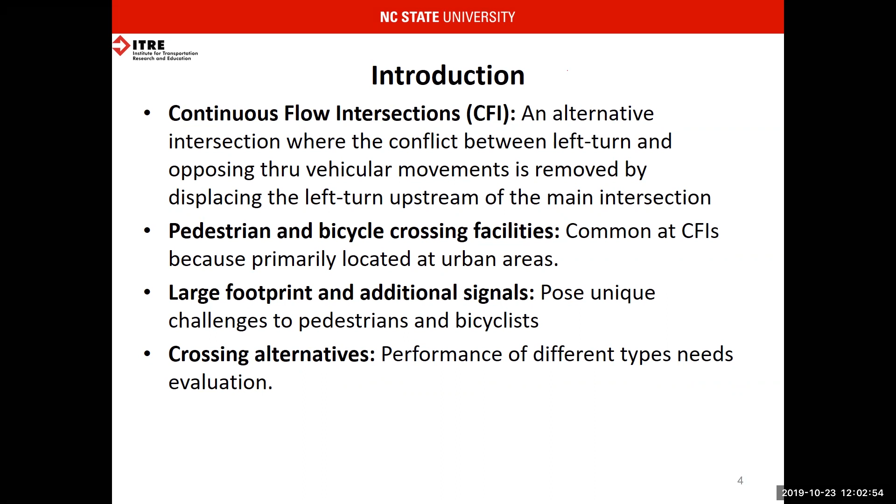Pedestrian and bicycle crossing facilities are common at CFIs because they're in urban areas, but they can be complex, and that's one of the reasons we did this work. CFIs, from a geometry standpoint, have quite a large footprint with additional signals compared to a standard intersection, but usually have a smaller footprint compared to the grade separated option, which would basically be the next option if you move from a standard signal and don't choose some type of alternative.

Let's talk a little about the reason CFIs are typically the vehicle of choice, and about the operation. The key motivation for the CFI is that it's cheaper than grade separation. Instead of spending $2 to 4, 5, even $6 million plus on a grade separation, acquiring right of way, and moving lots of utilities, this option can give a lot of benefit over a fairly long period of time. So it's considered often, and it's typically all about improving vehicular mobility, especially between the heavy through and left conflicts.

If you look at the big picture here on the bottom left, the whole idea is to separate conflicts. Using the west to south movement as an example, a left turn heading westbound conflicts with the eastbound through at a standard intersection, but we can remove that conflict by putting an intersection just upstream on the east side and adding another signal. If we do this at multiple approaches with multiple signals, we move those conflicts around to gain efficiencies so they no longer conflict. Now the lefts can go with the concurrent through movement without a conflict, and we gain lots of efficiencies from that.

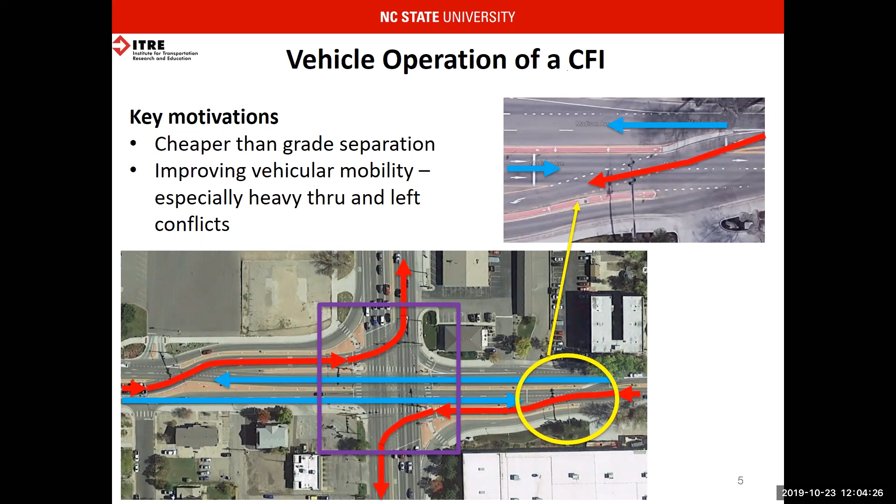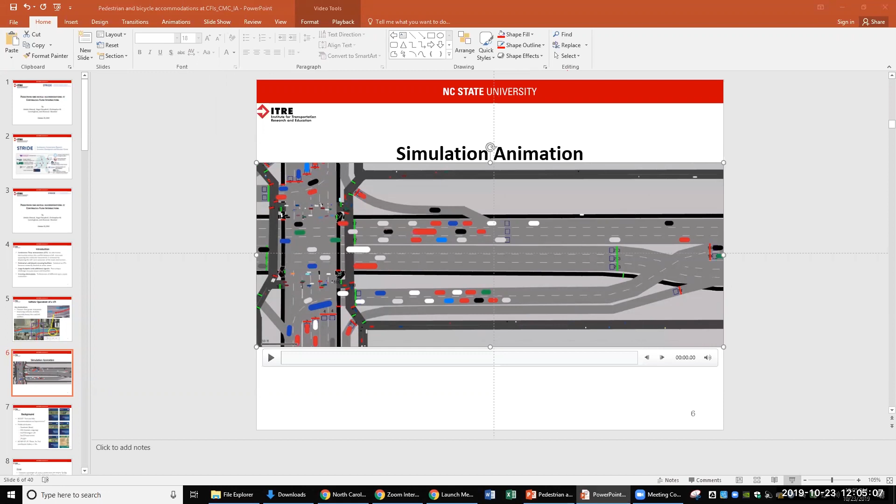Just to make sure everybody's with us here, I think most people probably know the CFI. I don't know if I'm going to get this to work. Let me try it this way. Why doesn't this work? It's okay, we'll move on, I think we've done enough explanation. One second, it's over here, that's the problem. All right, sorry about that.

A little bit of background: around 2010, the North Carolina Department of Transportation, which implements a lot of superstreets, sometimes called restricted crossing U-turns, got a lot of pushback on two main things. One being business owners in the area don't like being redirected and not having direct lefts, but also there are a lot of advocates for pedestrians and bicycles who push against the implementation of a superstreet.

So a project was done, two projects actually, one on the pedestrian side and one on the bike side, to look at the accommodations on super street and look at options for accommodating those users.

Around 2014, several alternative intersection and interchange guides, that's what AI stands for, were put out by Federal Highway Administration. The newest one was in 2019 on the quadrant intersection, so if it's not already out, you should see that soon. And then the diverging diamond interchange, which has ongoing updates to the geometrics, safety, and signals pieces of those guides, was published in 2014.

And then the median U-turn, that's the federal highway name. The common name leading up to that was the Michigan left, was put in place also. The restricted crossing U-turn, which we call the super street here in North Carolina, has even gotten a new name in North Carolina. And then what we're looking at today, the CFI, or the divergent left turn, is what Federal Highway calls it.

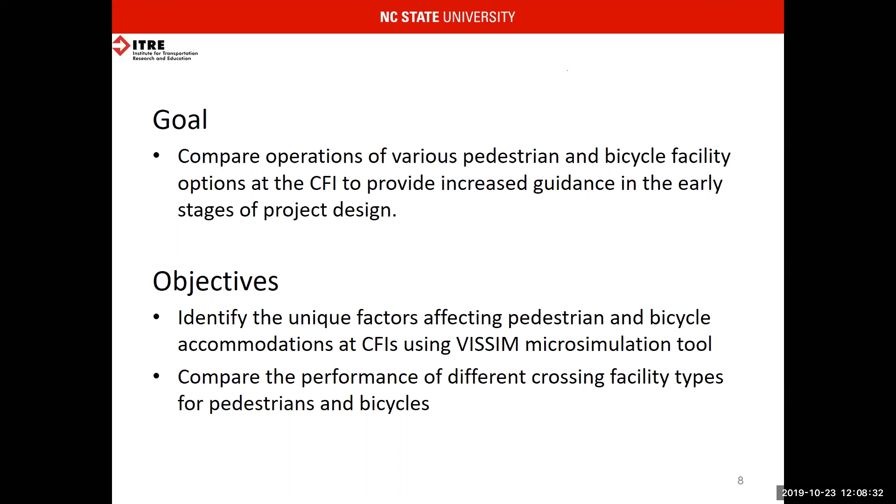So from NCHRP 07-25, there are a few options that several practitioners have recommended over the last decade or so for CFIs. The three that really rose to the top in several of those focus groups were what we call the traditional crossing, the mid-block crossing, and the offset crossing. So the focus of today will be operations at those three facilities.

So a little explanation: the traditional crossing, this is the one—if you go to Utah, you can see some of the earlier designs here. The traditional crossing has each of the pedestrian and bicycle facilities single staged. One thing you should focus on here is that when we're talking today about the divergent left turn of the CFI movement, we're just going to look at this southeast quadrant. So we're going to talk about this offset left here, this left-over for the CFI, and how it conflicts with the west-to-east or east-to-west pedestrian or bicycle movement here.

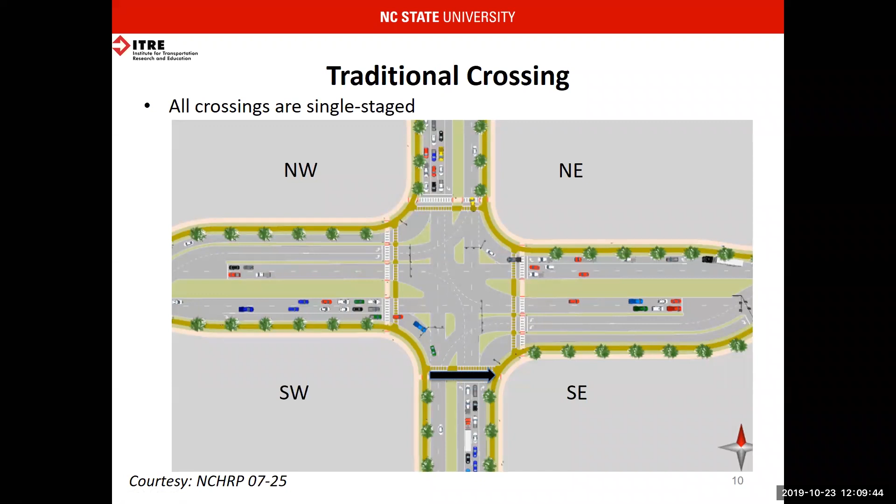So here we have single stage crossings on all approaches. It's not an efficient design, but the problem here is that the left turn conflicts with the side street crossing here on the south side. So the left turn movement entering has a conflict. And because this problem exists, if there's significant pedestrian demand here, then we get a lot of inefficiency in the CFI that we thought we were going to gain with the vehicular movements, because now we have to serve four possible phases.

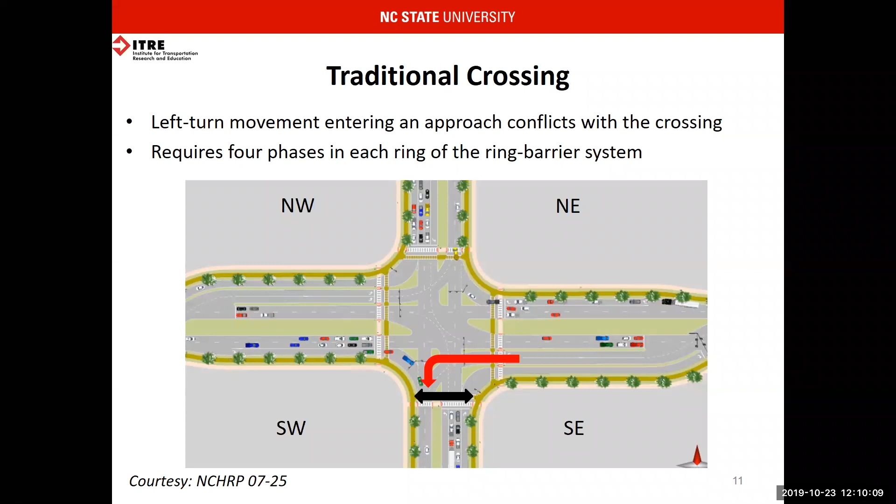So just real quickly, I could show this in a lot of different variations. So this is the simplest version.

Let's talk about the mainline movements. If we have throughs going, then the concurrent peds can go in parallel. But then the throughs can still go with the left turns now because they no longer conflict, but now the peds can't go. So we have to run the peds separately first if the ped push button is pushed.

And then we cross the barrier and go to the side street movements. And now the concurrent peds going north and south can go with the north and south through movements while the leftovers go. And then we have to turn the peds off.

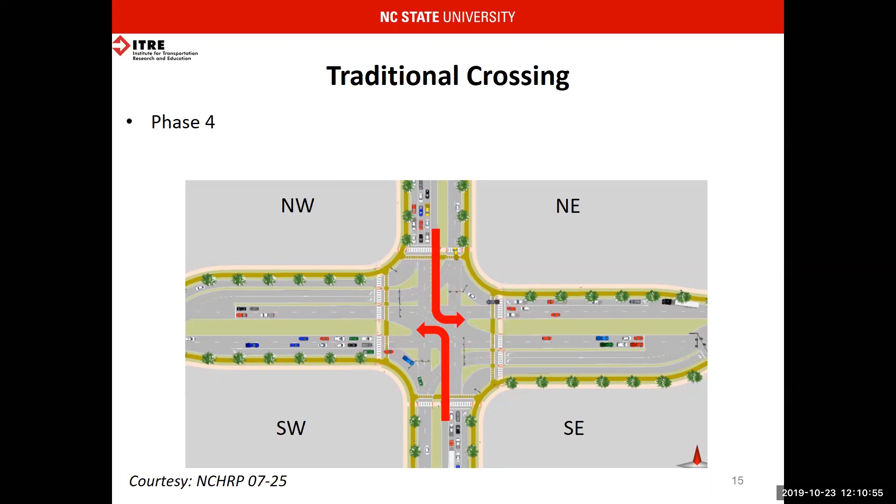And I think I have that wrong. Yeah, the left turns will lead into the through. So that would be 4 possible phases.

And so it's not super efficient if you have any significant pedestrian volume at all, regardless of how well the design works, walking through it as a pedestrian or a bicyclist.

The second option is a mid-block crossing. It's similar to the traditional crossing. The only thing we do is we take the north-south pedestrian movements and we shift them down to where the leftovers are, up and downstream.

Now, this is primarily done for safety. So if you imagine in the traditional crossing with the pedestrian crossing movement moved up close to the main intersection, we have lots of different movements to cross. It's confusing. It's a longer span of lanes to cross.

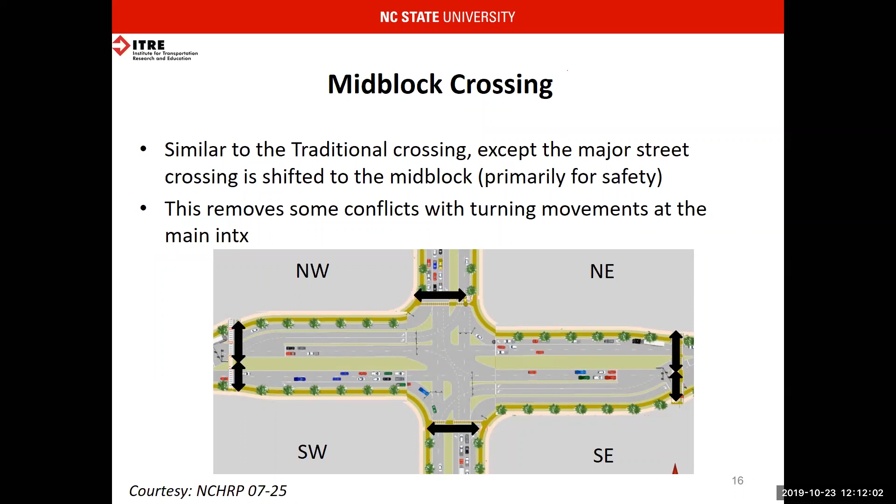And so this would really be more for a safety treatment. And so if you know you've got a heavy origin destination from one quadrant to the other or vice versa, then you can set these up with mid blocks to help facilitate the movements and get them away from the main intersection. And it does remove a little bit of the conflicts also.

So the mid block signals are placed at the existing displaced left turn as I described. And then signal timing of the mid block does not incur additional delay to the through vehicular movements. You'll see this, I think right as I get towards the end of my portion of the presentation, when we calculate the cycle lengths literally are the exact same for the traditional and for the mid block. And so from an operations standpoint, from a timing standpoint, they're basically the same.

It's really just a safety treatment. But we'll see what happens when we look at the times, or the stop delay and such, the different performance metrics in a second.

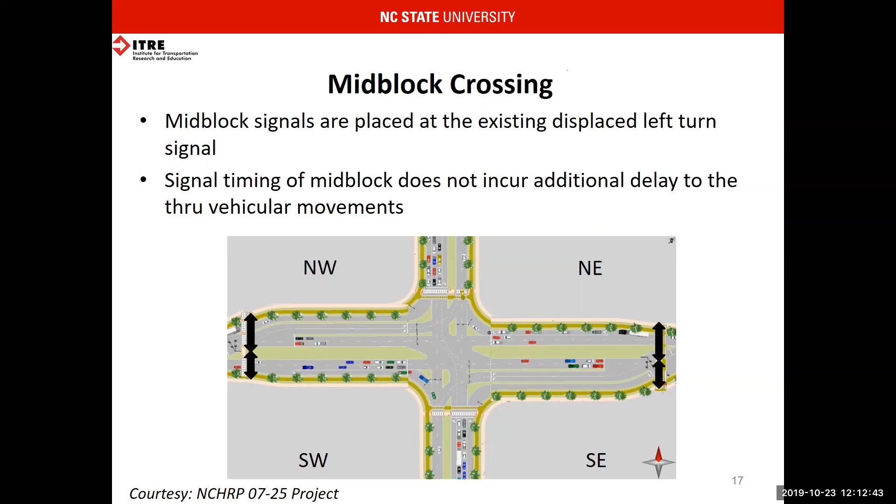And then the third one is an offset crossing. So basically, the left turn conflicts, if you look here in red, that existed where the crossing used to be, we now offset that ped crossing on the other side of the left turn. So now that conflict no longer exists.

And so we remove this conflict. Now we don't have to hold that left while the peds cross. It can actually cross between the through and the left turn movement, and we get rid of those two exclusive, or those two ped phases that had to be called separately earlier.

And so the rings accommodating pedestrian bicycles are now only 2 phases. So we get our efficiency back. We tighten up the intersection a little bit for the peds and bikes.

Okay, and then all crossings are multi-stage. So if we see here, we cross in one stage going from west to east or east to west, depending on where you are in the crossing. So let's just assume we're coming from the southwest quadrant.

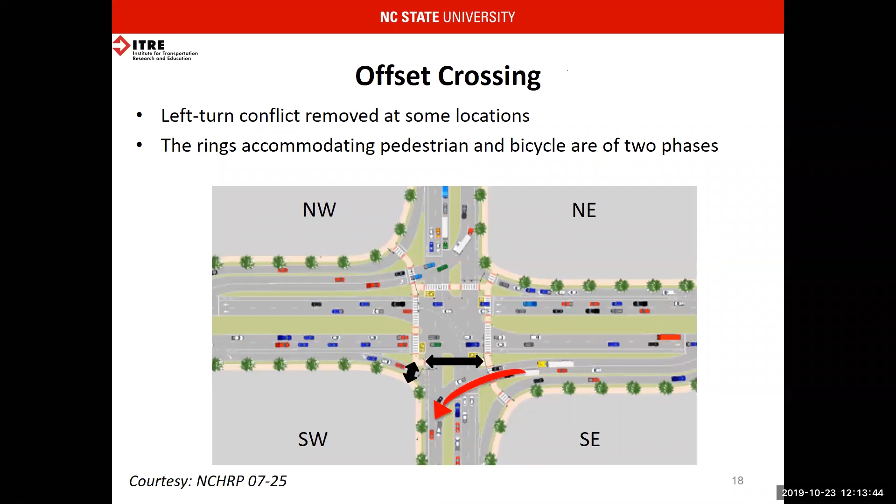We would cross southwest with the left turns crossing. The left turn would end. And then now this movement can go with the through. And so it happens nice and clean.

Now, one of the things that we're looking at, we're going to compare these 3 different CFI designs, but we're also going to compare them to a standard intersection.

So this looks a little messy here, but basically what we have here is a standard 4-leg intersection. It's a 6-lane facility in both directions with dual left turn lanes on all approaches. And so if you can just imagine that each of those CFI options, we're gonna show at the end here how that compares to the standard intersection also. So just keep that in mind.

Now the geometry, that's not always a 6-lane with a dual left turn lane. The geometry is selected by looking at the V over C for the different volume combinations that we have for the CFIs. And so we'll talk a little bit about how we did that in a second.

The alternative scenarios we generated in our simulation models for the bicycle had 2 different options: walking with the pedestrian on a shared lane facility, using the sidewalk configuration like a shared use path, or having an exclusive lane on the road. So it's one or the other as the option for bicyclists, while pedestrians will always walk on the sidewalk.

We also compared 2 different divergent left turns, or CFIs. We had a partial CFI, where only the DLT legs are on the major street, and a full CFI, where the DLT legs are on all approaches. For the right turn control type, we had signalized movements, and vehicles always yield to the pedestrian or the bicycle.

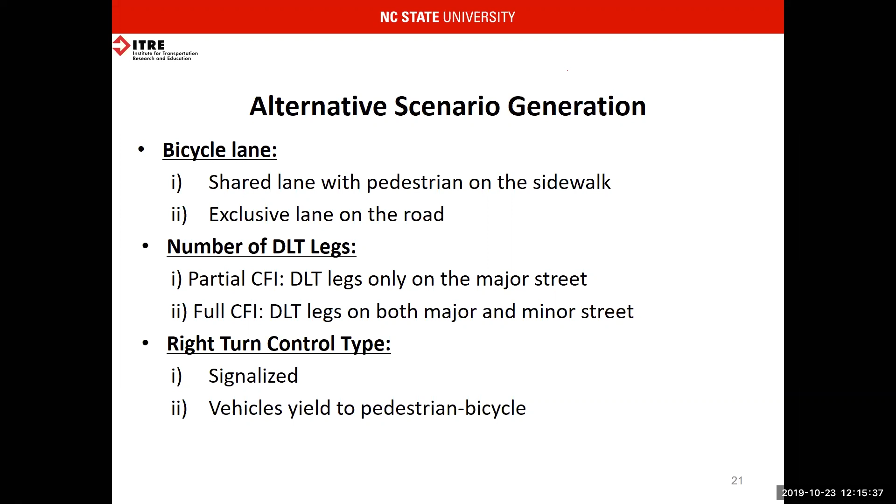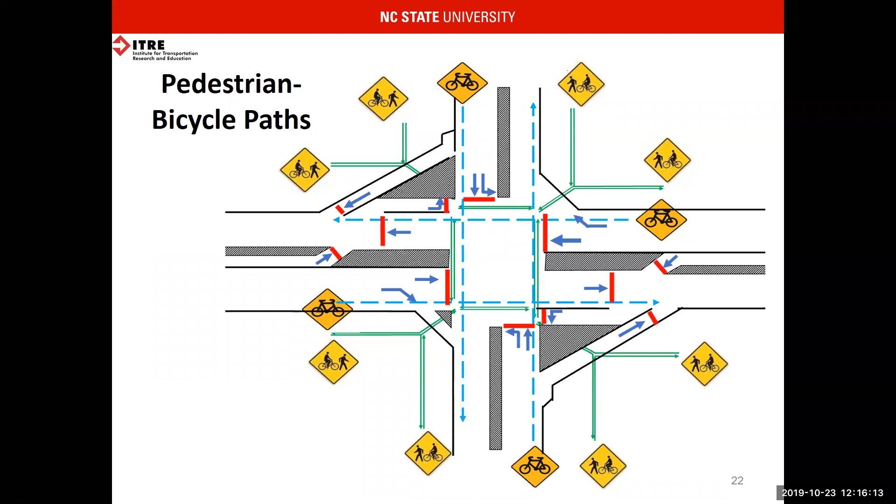Building a little bit here, vehicle movements are shown on each approach with the stop bars, and I'll animate to show exactly what we meant on that last slide. Shown in blue are exclusive bicycle facilities that we included, going with the vehicular traffic in the through lanes. In green, where the pedestrian facilities are from each quadrant, we have shared facilities for bicycles and pedestrians combined, just to make sure everybody understands.

A few parameters in simulation you should be aware of: the volumes were created using a tool called Cap-X, which stands for Capacity Analysis for Planning Junctions. This was created by Federal Highway Administration a long time ago, but it's had several recent updates in the last 6 to 8 years, and more recently with some ICE tools to include various facilities. We created our vehicle volumes based on a V over C of 0.7 for the facility.

The speed distributions were important for pedestrians and bikes. If we're going to look at things like travel time, we needed the speed distribution for pedestrians and bicycles, so we collected field data on 6 North Carolina intersections where these types of designs were in play. For simulation, we ran each simulation for 1 hour and replicated that 25 times.

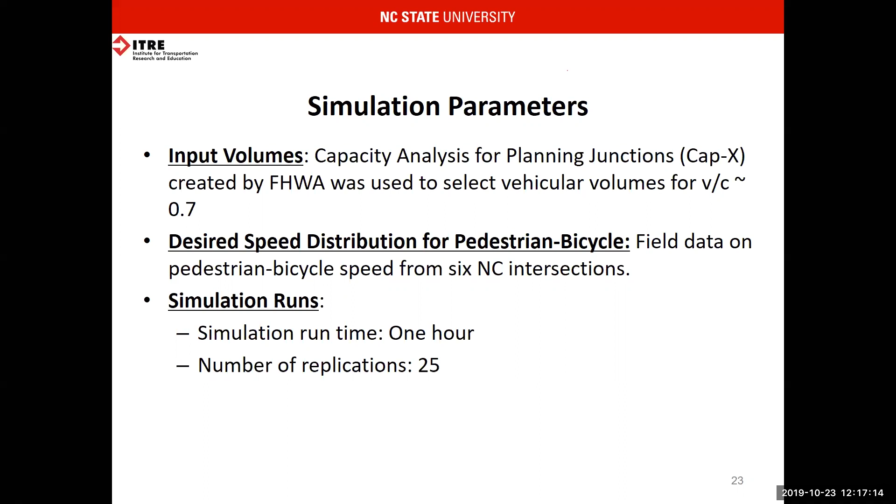From the signal timing standpoint, a semi-actuated signal system was assumed with standard detectors for each model. The cycle length was minimized using linear programming, and the V over C for each vehicular movement had to be less than 0.85 - this was one of the constraints we put on it.

For the partial CFI, which is the leftmost portion of the graph, the cycle lengths were the same as the traditional mid-block because we're just moving the pedestrian down to the mid-block, but it functions very similar to a traditional intersection from a signal timing standpoint. For the offset, because we shrunk the crossing distance on each approach by moving the crossing point past the left turn, the cycle length was a little smaller in those cases for the full and partial CFI.

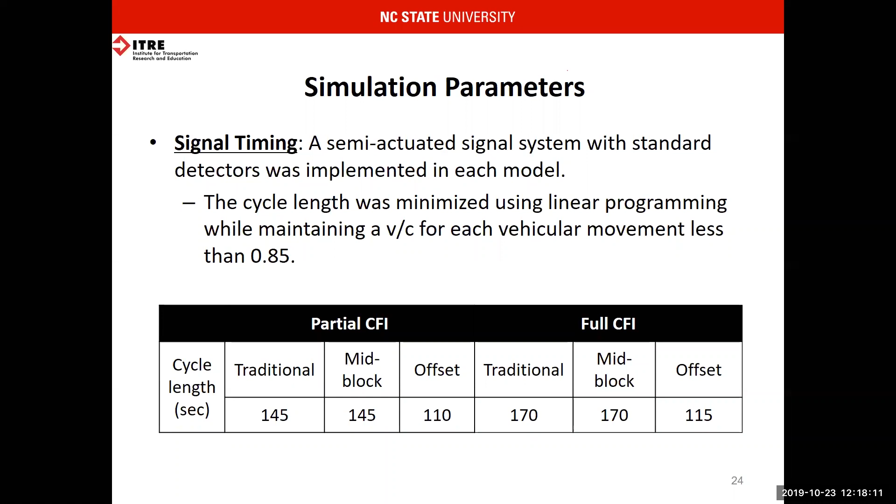And Ishtiak now will talk a little bit about the performance metrics and analysis. Thank you very much, Chris. The remaining part of the presentation that I'll be presenting is about the simulation results. Thanks, Chris, for giving such a nice introduction on the CFI.

Before I start with the performance measures, let me go back a few slides - for example, here where we have the quadrants. The performance measure results are divided into 2 parts: one is the route level performances, aggregated for each of the crossing alternatives that we have from the 3 crossing types and other variations.

As you can see, there are 4 quadrants here, and we can divide all the routes into 4 categories. One is crossing the minor street, as in this figure, either between the southwest and southeast or the northwest and northeast quadrants. The other is crossing the major street, which requires crossing a lot of lanes for pedestrians and bicycles because of the displaced left turn - the footprint of the intersection is larger than a standard intersection. That route category is like the southwest and northwest between these 2 quadrants, or the northeast and southeast quadrants.

The remaining 2 category types are the 2 types of diagonals that we have. Usually we have 1 type of diagonal, going either between northwest and southeast or between southwest and northeast. But in a CFI, like a partial CFI, these 2 types of diagonals have 2 different configurations - the ones facing the displaced left turn intersections, for example at the corner of the northwest. Let me use a marker here.

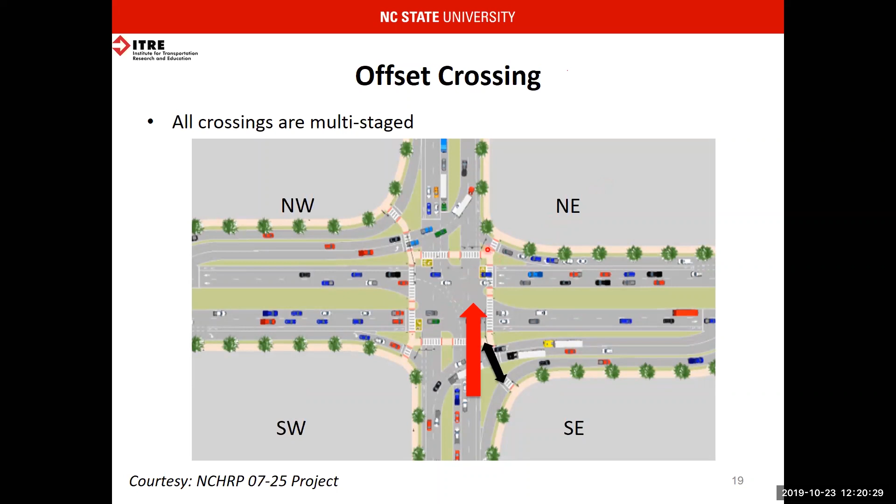So here is the diagonal that faces the displaced left turn intersection, and this one also here, and this one. So I'm terming that as a diagonal with DLT, or the displaced left turns. And the other ones are the southwest and northeast diagonals, which don't face the displaced left turn intersections.

About travel time and stop delay, if we compare different routes or different alternative scenarios, in many cases travel time and stop delay give similar trends across different routes. If those routes, like the lengths and configurations, are very similar, stop delay becomes a function of travel time. However, in some cases, for example the midblock crossing, some travel times for some routes will be much shorter than other routes. That's why we keep travel time as separate.

But in this presentation, overall on an aggregated level, we found that these two trends give similar trends across different alternatives, not values, but trends. So in this presentation, I'm just including the stop delay and the number of stops, which is very important for pedestrians and bicycles.

So let me start with the route level analysis. This is for partial CFI, and in these 2 bar charts I'm showing the most common trend of stop delay. If you look at the left-hand and right-hand side figures in this slide, they have the same trend in terms of the traditional at the left-hand sidebar, midblock in the middle, and the offset at the right-hand side.

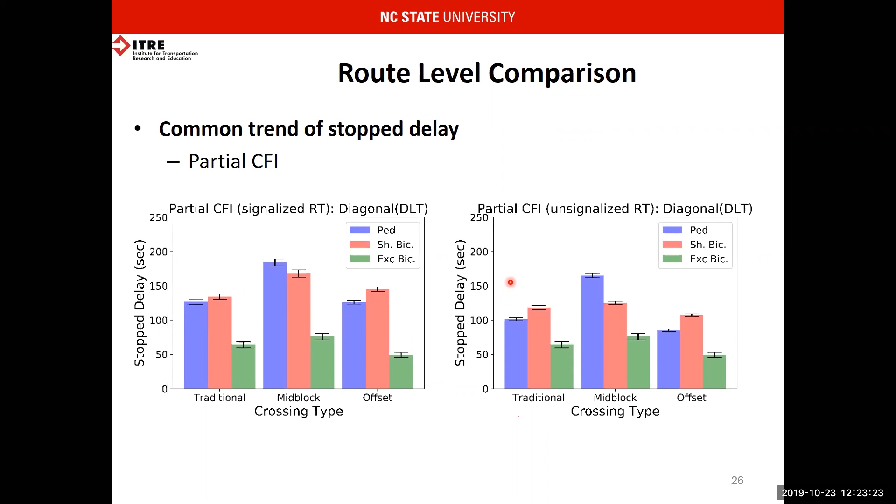This slide shows the trend for the full CFI, where we can see that in a full CFI you have 4 displaced left turns. So the efficiency of the offset crossing increases compared to other crossing types like the traditional and midblock. Because if you recall the phasing sequences that Chris showed, the traditional and midblock crossing have similar phasing sequences, and they have 4 phases. If you have a full CFI where all the left turns are displaced, then the offset crossing can run in 2 phases only. So that's the benefit of that.

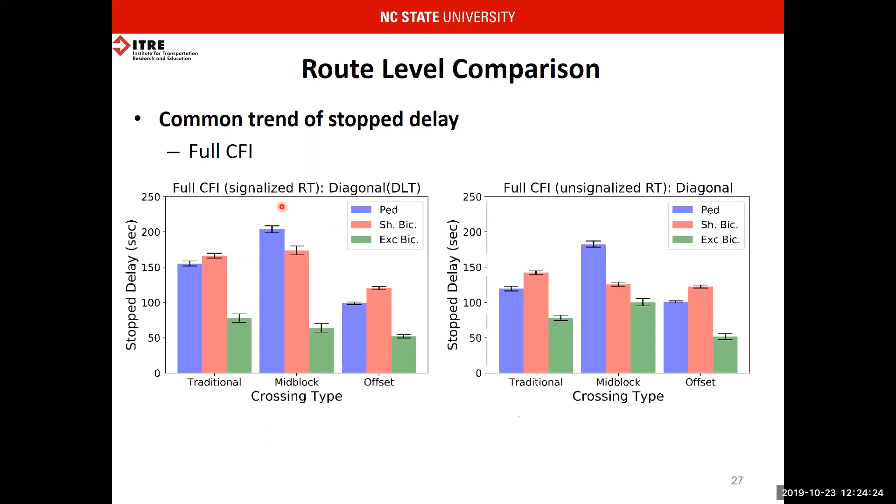You can see it in terms of the stop delay for pedestrians and bicycles. The offset crossing generated the lowest stop delay compared to the other 2 crossing alternatives. The midblock crossing is still having the highest stop delay because on the major street - this is the diagonal, which is a combination of the major and minor street crossing - on the major street crossing, the midblock crossing is 2-staged.

So this slide shows the trend of number of stops for partial CFI. And this trend is completely different compared to the stop delay, because the number of stops now has become a function of the number of signals that you face and the number of times you have to stop.

So the most common trend observed across different routes, here I'm showing two, a major street crossing and the diagonal crossing with displaced left turn intersection, is that the offset crossing has the highest number of stops.

And the reason is pretty clear, because if you recall the diagram for the offset crossing, where it's multi-stage, although it doesn't have a conflict with the parallel going left turns, for that offset setting, pedestrians and bicycles now have to stop more than once to cross the minor or the major street, as well as for the diagonals. So consequently, the offset crossing has the highest number of stops.

The mid-block and the traditional crossing, in some cases, have similar numbers of stops depending on the route type. For many routes, we have found that the traditional crossing has the lowest number of stops, just like this diagonal route shown here. And that trend remains the same for pedestrian, shared bicycle, and exclusive bicycle.

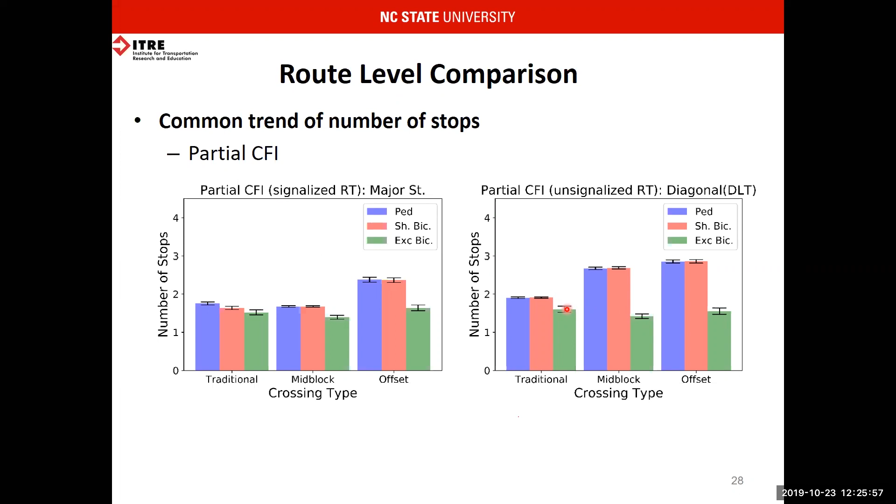This is the trend of number of stops for full CFI, and as we can see, still the offset crossing has a very high number of stops, where the traditional crossing has the lowest number of stops. Of course, we can see some little variations here. The exclusive bicycles for mid-block crossing generated a higher number of stops, but that difference between the offset and mid-block crossing is probably not statistically significant.

And we will show which of these differences that we are seeing on an aggregated level are statistically significant or not.

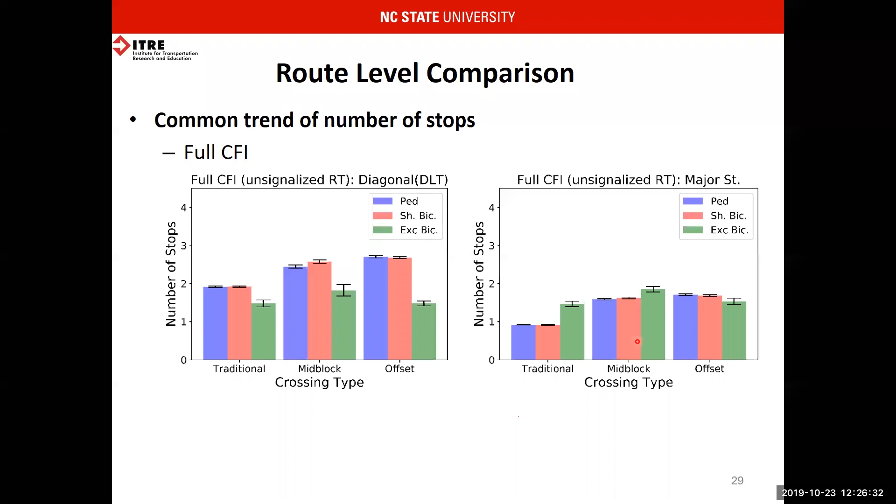So as I said, depending on the route types, this common trend may vary for some routes. Here I'm showing two plots, one for stop delay on the left-hand side and number of stops on the right-hand side. This is the deviation from the common trends of stop delay and number of stops that I've just shown. This is the minor street crossing in a full CFI with signalized right turn.

And as you can see, unlike the other crossing types, the traditional crossing generated the highest stop delay, very similar to the mid-block crossing, but still the traditional crossing is the highest, which is a little unusual. On the right-hand side, in terms of number of stops, the mid-block crossing is the one performing worst, and the offset crossing is sort of in between the traditional and mid-block crossing.

So there are several reasons behind this deviation from common trends. One is that some routes have multiple signals, but pedestrians and bicyclists can cross these routes at once, for example if those signals have progression opportunities, like coordinated signals we see for vehicles. So that's one of the reasons. And of course, pedestrian and bicycle speed is a big factor in progressing through multiple signals at once.

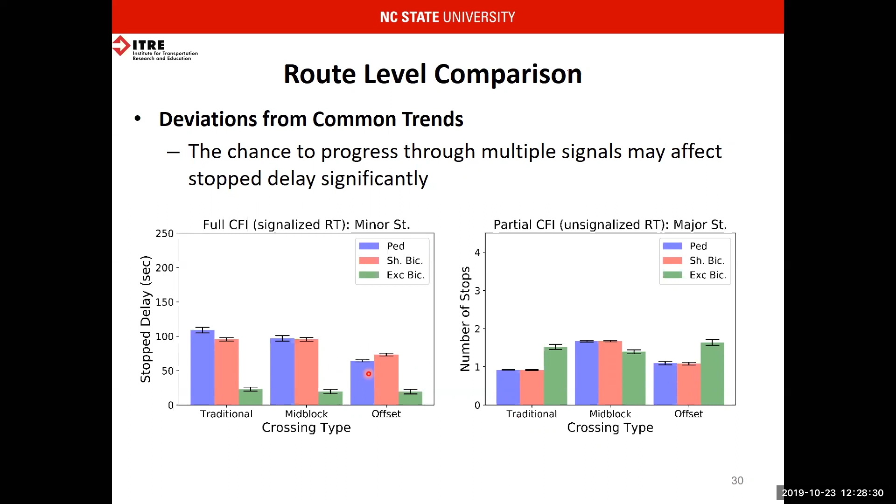So as I've just mentioned, it's important to look at the route level, because if we are focusing on a single route type to compare different alternatives, an aggregated measure will be misleading. That's what we've been showing in this slide. So let's take a look now at the aggregated level results.

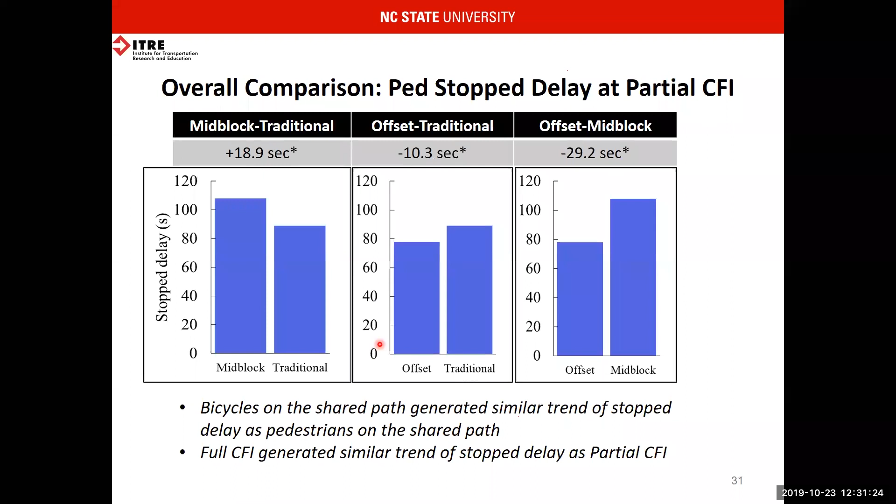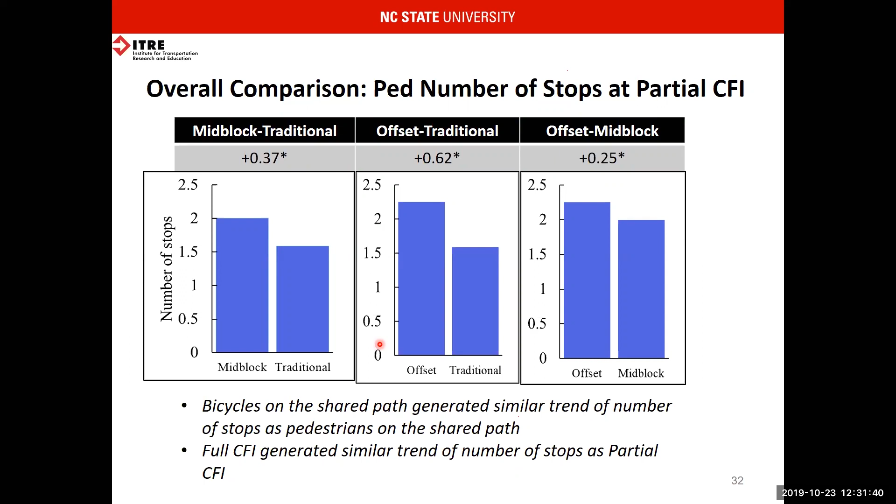These results are about pedestrians, and the bicycles on the shared path generated the same results, or at least similar trends. The values were different, but the trends were similar.

...is not statistically significant anymore. So we cannot draw any conclusion that these two performance measures are different, because they have similar phasing, and the minor street crossing is particularly very similar between these two alternatives. So we are not seeing a statistically significant difference in terms of stop delay.

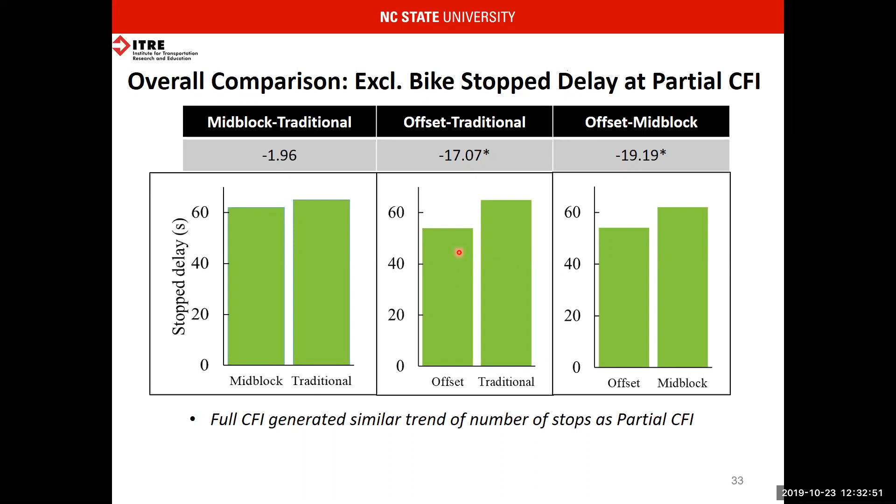However, the offset crossing trend is still the same for exclusive bicycle, as we can see it generated the lowest stop delay for exclusive bicycle as well.

From these charts, several things are pretty obvious from our simulation run: the offset crossing, as Chris said, generates the lowest stop delay for both pedestrians and bicycles, and the highest number of stops for all types of users. The traditional crossing is sort of in between in terms of stop delay between the mid-block and offset crossing, but in terms of number of stops, it's the best option among these three.

Let's talk about our findings comparing with the standard intersection crossing. The standard intersection generated higher stop delay than the equivalent traditional or offset CFI crossing. The main reason is the number of phases and cycle lengths. Although it's a traditional crossing with still 4 phases, because of the displaced left turn it has a slightly higher efficiency than a standard crossing.

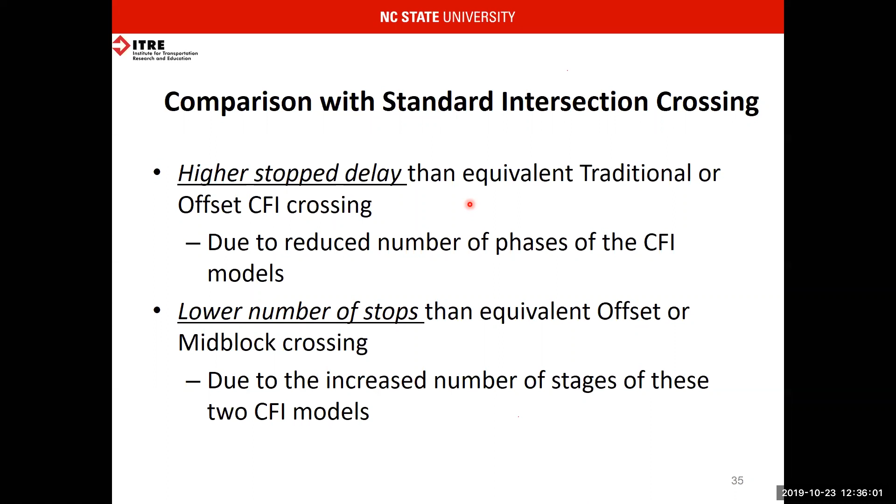So that's why we are seeing a lower number of stops in standard crossing. These are important observations because when we are switching from a standard intersection to any type of CFI, and we want to put emphasis on one of the two or three performance measures I'm showing, these observations are important. Another thing important to note is that the experience faced by pedestrians and bicyclists could be different. Bicycles, if they have to face a higher number of stops, probably have to dismount and mount again. So there are a lot of things we need to consider on a user level, which is very difficult to quantify, like user level of comfort.

So to summarize the major findings here, overall the cycle length, number of crossing stages, and the progression through these stages are the major key factors we found from our simulation runs for pedestrian and bicycle accommodations at CFI.

For the shared use path, for pedestrians and bicycles, in terms of stop delay, the offset crossing performs best because it generates the lowest stop delay.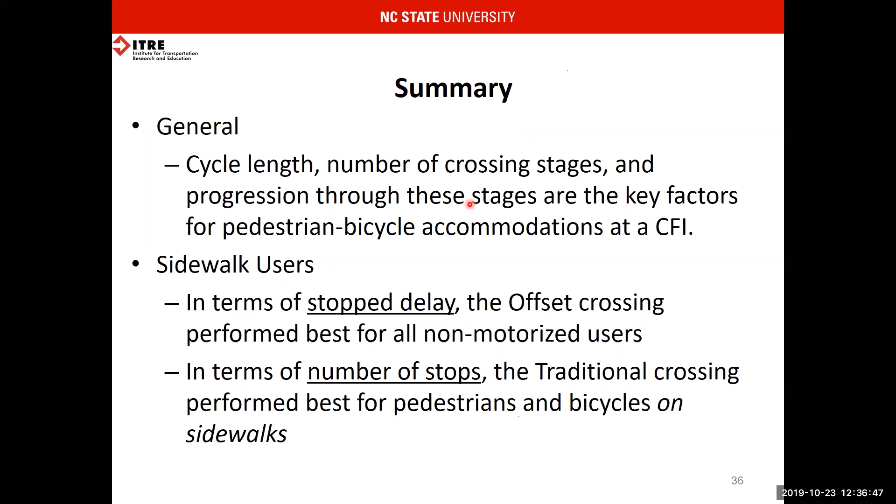In terms of number of stops, the traditional crossing performs best for pedestrians and bicycles on the sidewalks. For bicycles on the exclusive bicycle lanes, we found that the traditional and the midblock crossing have somewhat similar trends.

For the exclusive bicycles, they experience the least stop delay and number of stops compared to bicycles on sidewalks. So if there is space on the site to put exclusive bicycle lanes, it's always preferred, so they have the least stop delay as they are moving with the vehicular movement.

Regarding the standard intersection comparison, the traditional crossing in a CFI performs better than the standard intersection. But again, all these trends may vary significantly at the route level, depending on the type of route.

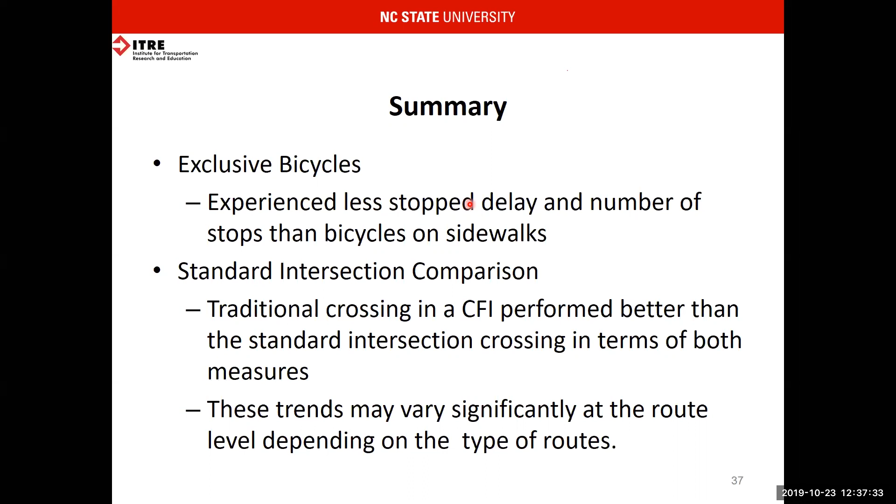So Chris, do you have anything to add? No, I don't think so. We have some time for questions, and I have one. If you just use the chat box for that, that would be helpful.

And we see these compared by total travel time through the various intersections for cyclists and pedestrians. It would be useful to know the total delay, including out-of-way travel, rather than just stop delay, since the mid-block in particular looks like it could create significant increases in travel time compared to traditional.

So Dwayne, the reason we didn't show, and correct me if I'm wrong, Ishtiak, the reason we did not bother showing the travel time results is because...

It's because the travel time delay is basically the sum of the stop delay from the traffic control devices, plus any geometric delay that might be involved. It's basically a sum of all the different delays. But the primary measure of delay that travel time was capturing was stop delay. So we basically chose to reduce the amount of confusion in looking at the graphs and just show the stop delay. The results are basically the exact same, with the exact same trend.